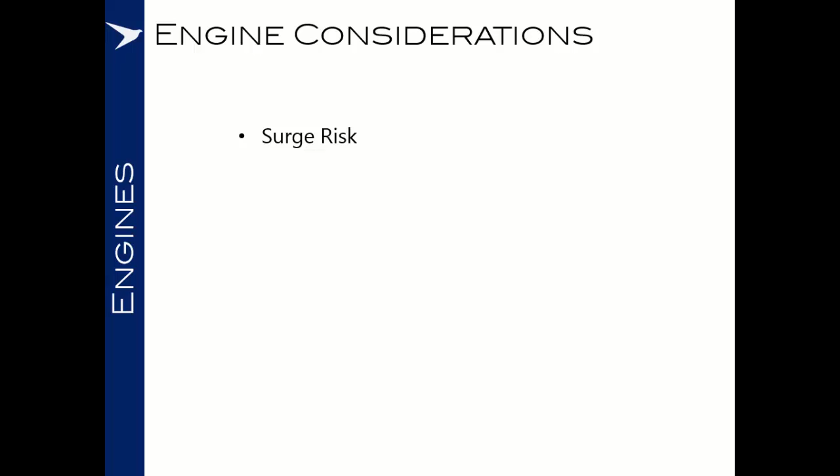So in this brief, we will cover surges, internal engine damage, core lock, rollback, and multi-engine flameout.

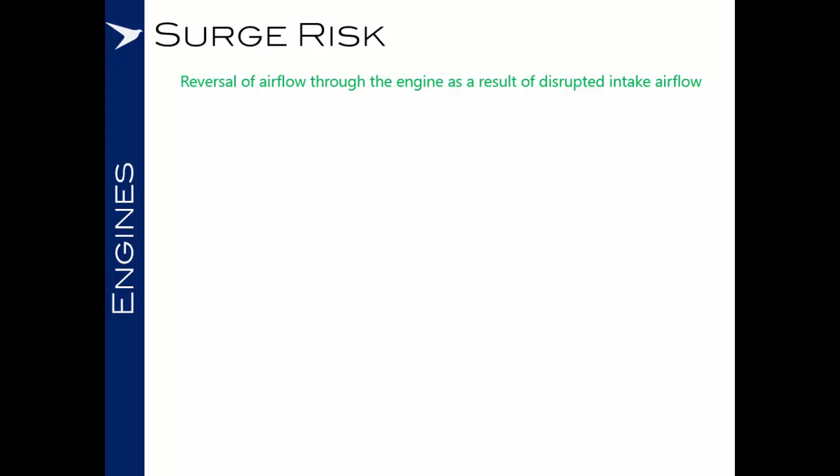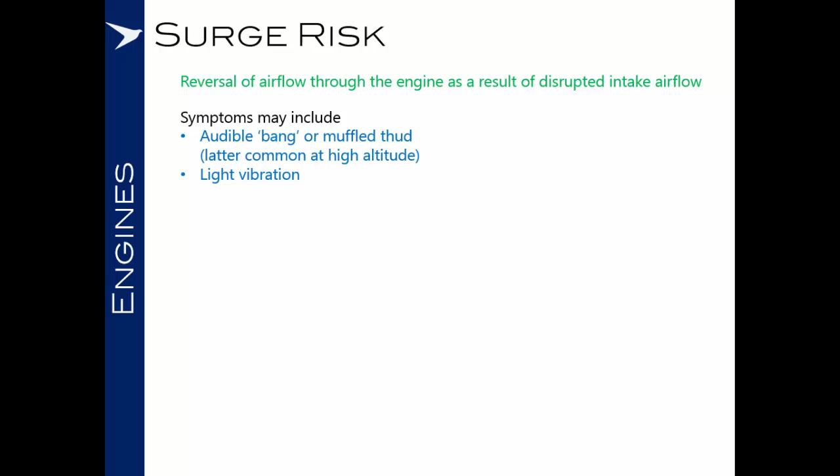Taking surge first then. A surge, or a compressor stall, is a reversal of airflow through the engine as a result of disrupted intake airflow. Symptoms may include an audible bang or a muffled thud, and the latter is more common at high altitude. The bangs are often associated with high power settings or low altitude. You may get light vibration, a rapid rise in EGT.

Surges tend to be in one of three categories. The first of these is a minor surge, where no crew action is required to resolve the surge and the engine will quickly return to normal.

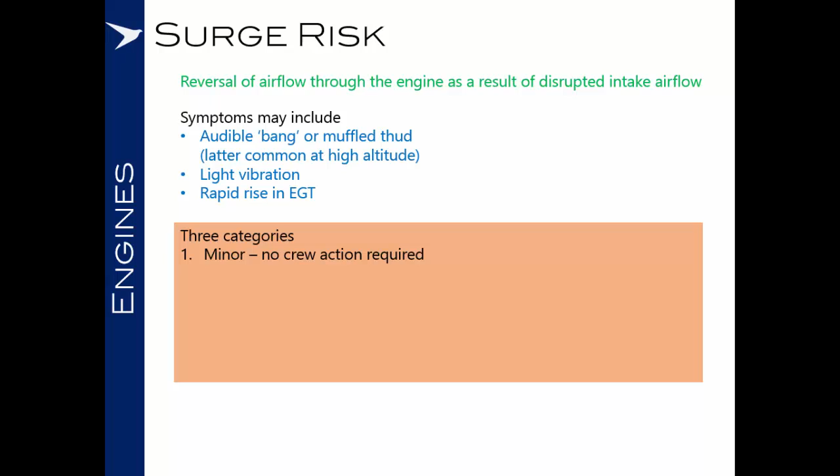The second may see EGT rise to the red sector and remain constant, in which case the crew will be required to reduce thrust to clear the surge and confirm that the EGT reduces. If the surge appears to be resolved, then slowly and cautiously advance the thrust and monitor for signs that the engine may still be surged.

And if the engine surges again, the crew may be required to maintain a low or idle power setting and bring the aircraft back with limited thrust.

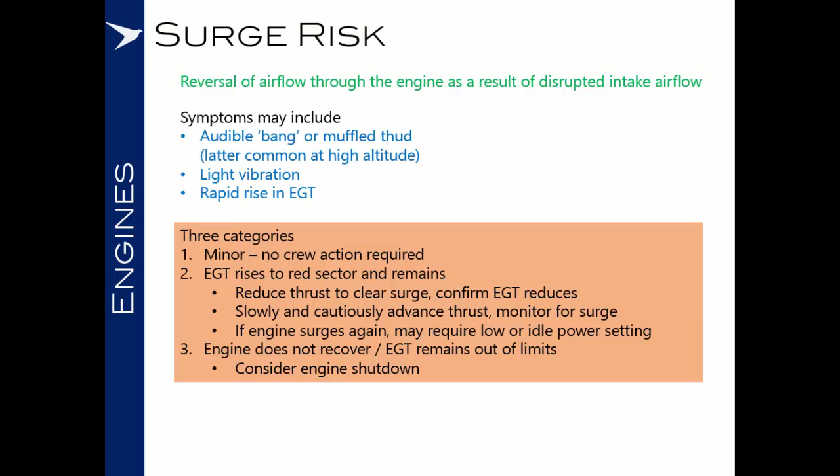The third type of surge is where the engine fails to recover and EGT remains out of limits even with idle thrust, in which case your aircraft may have drills which include an engine shutdown, perhaps an attempted relight. In any case, the guidance has to be to follow your own aircraft checklist and look for your type-specific details.

But as a general note, it's often the case that an engine at idle will still produce less drag and offer some power to aircraft systems, so shutting the engine down is often considered to be a last resort. And even with engines in surge and throttles at idle, an aircraft upset can still be recovered.

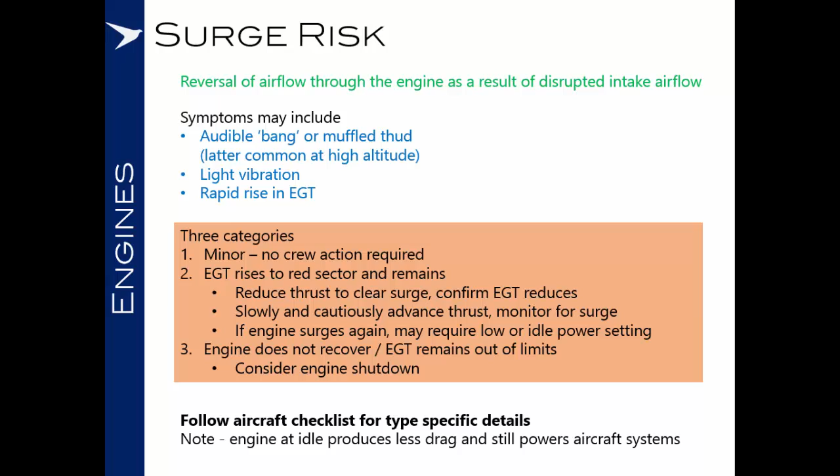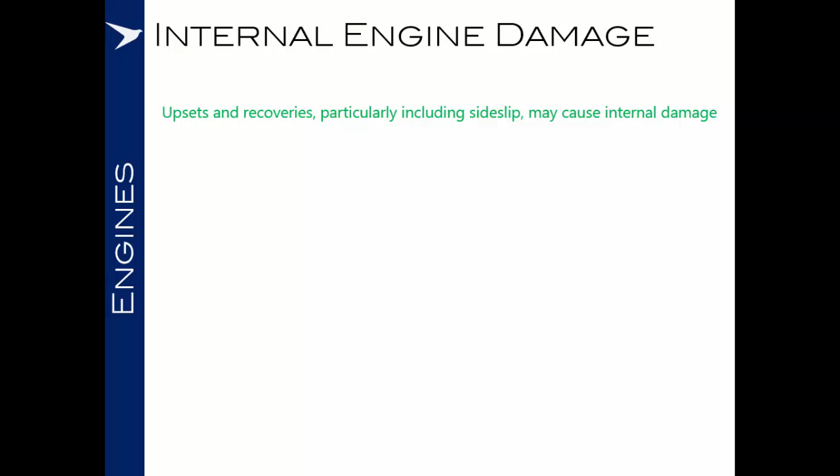Due to the high loads experienced in upset recovery, and particularly where there is any degree of side slip, there's a possibility that internal damage may occur in the engine. Be prepared for the fact that you'll probably get some adverse engine indications during upset recovery, and fly the aeroplane first. You must fly the aeroplane first and recover from the upset, establishing a safe flight path before dealing with any adverse engine indications.

And of course, there will be a startle factor associated, and particularly with surges or compressor stalls, where they may be accompanied by a loud bang and extreme engine indications, it can be very tempting to get your head inside the cockpit and start trying to deal with the engine emergencies.

You must resist and concentrate on flying the aeroplane to safety. Once you're in a safe flight regime, continue to fly the aeroplane first and ensure that there are no secondary upsets and that the cause of the first upset is discussed. Then methodically follow your checklist for adverse engine indications which remain, and be prepared for the fact that even if you don't have any instant adverse engine indications, you may still have some engine damage, so treat the engines with care.

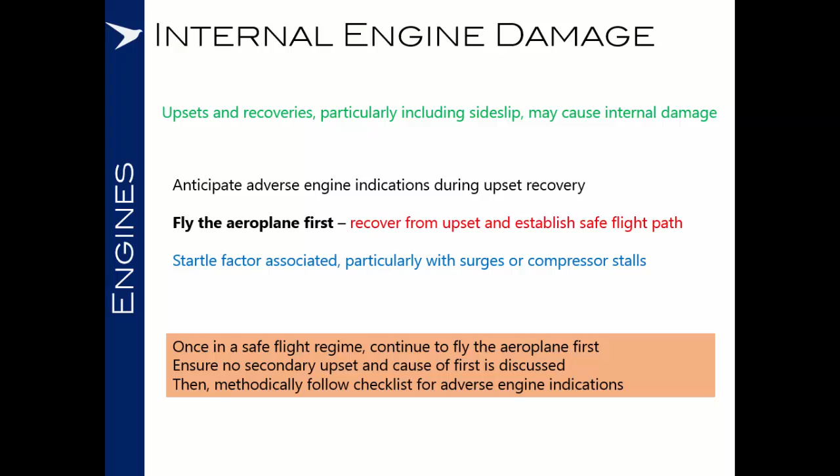Moving on, let's consider core lock. There's potential for this to occur after an abnormal thermal event in the engine. For instance, the engine may have flamed out at a low airspeed following an upset.

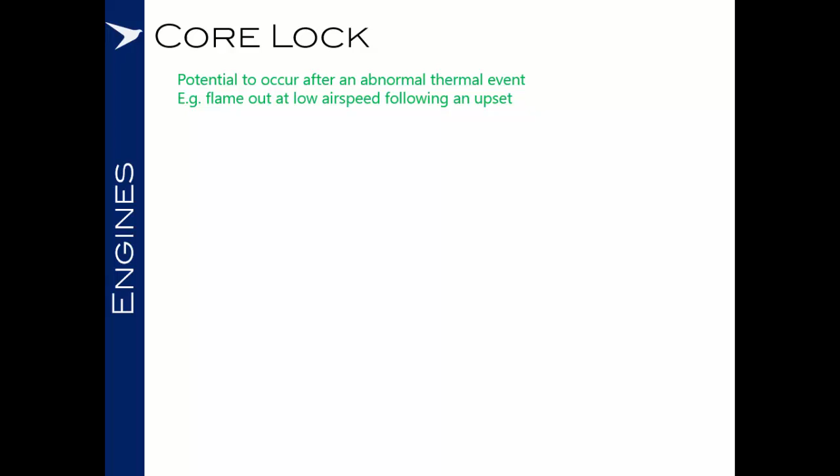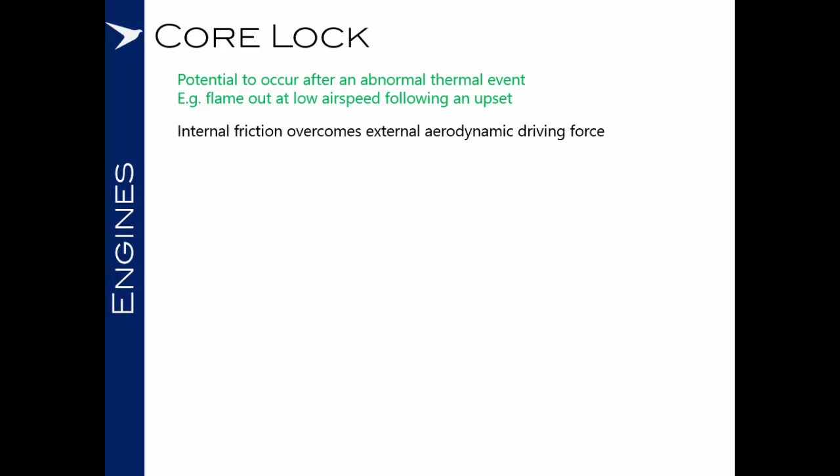A core lock is where the internal friction in the engine overcomes the external aerodynamic driving force which keeps the engine windmilling. This causes the core of the engine to stop rotating, and as the engine is rapidly cooled, the differential cooling of the materials inside causes the outer casing to cool faster than hotter internal components. As the casing cools, it shrinks and clamps down on the core, locking it and preventing rotation.

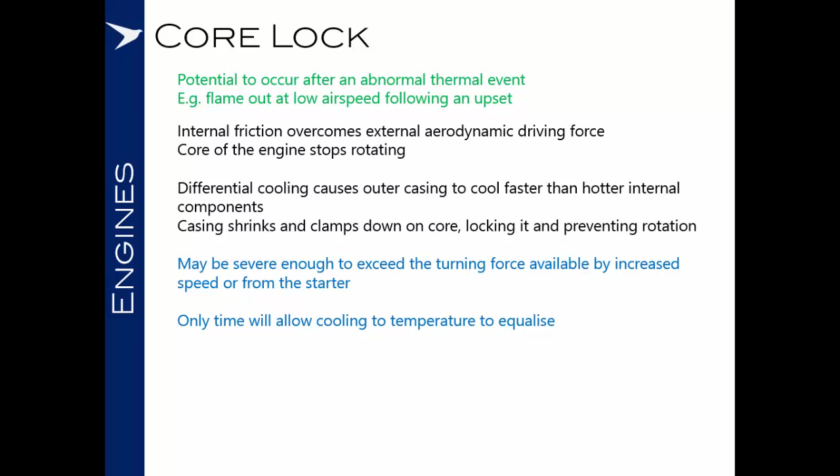There is potential for this to be severe enough to exceed the turning force available by increasing speed or from the engine's own starter. The only way to overcome core lock is to have enough time to allow cooling to occur and for the temperature inside the engine to equalise.

So after an upset, monitor the engine instruments, and if you see that the engine spool speed is zero, there could either be a case of mechanical failure due to damage incurred by the upset, or core lock. In either case, you're looking to achieve your best lift over drag speed.

Don't be tempted to immediately go into trying to achieve your best windmill speed and start to work through your forced landing options. At this point you're trying to maximise your time airborne to allow cooling throughout the engine, and if you see that rotation begins in the engine, then you can contemplate diving for a windmill speed and relight.

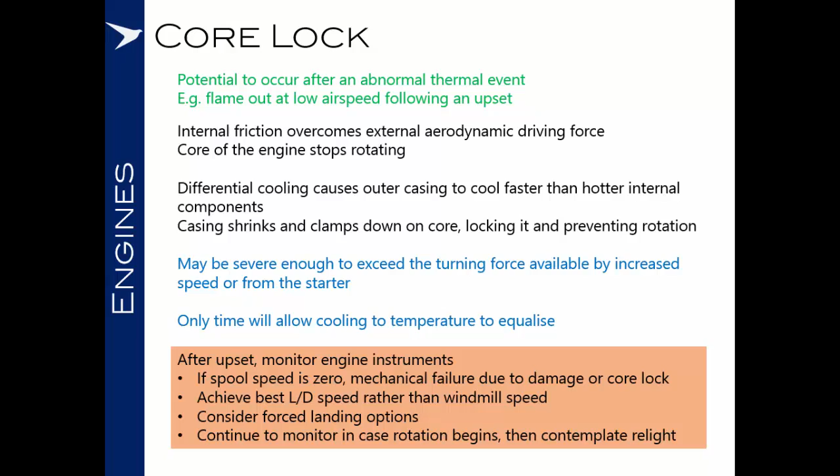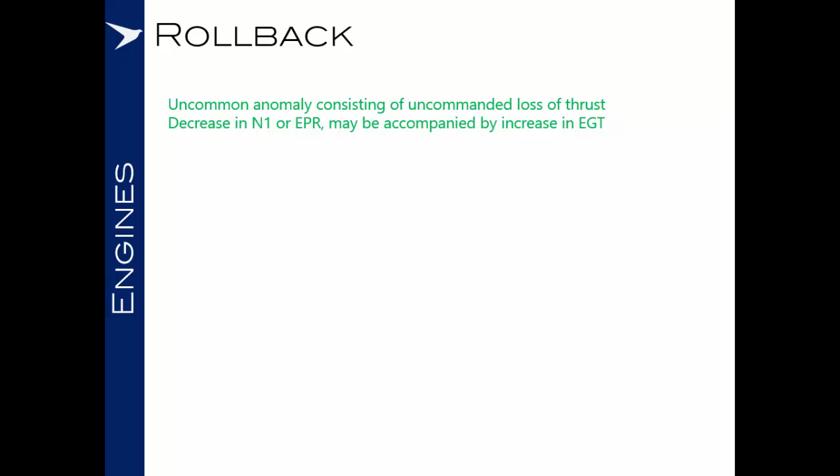Rollback is an uncommon anomaly consisting of an uncommanded loss of thrust with a decrease in N1 or EPR, which may be accompanied by an increase in EGT. It can be caused by a high angle of attack, disrupted airflow, a mechanical failure, fuel control issues, icing, or moisture.

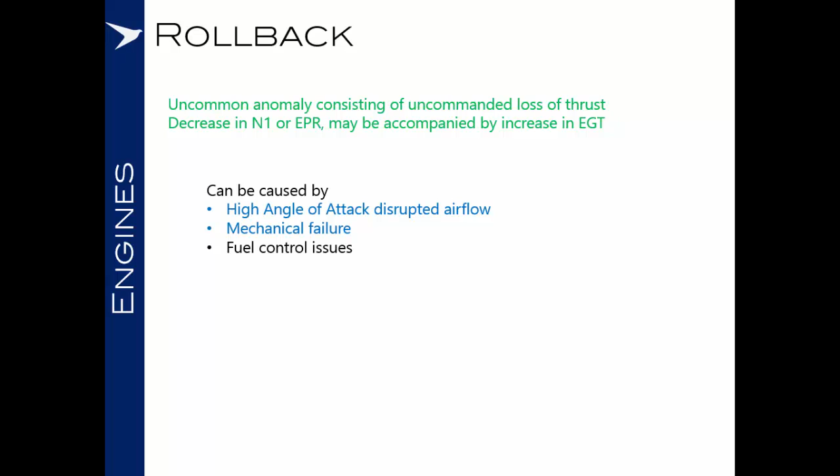The two causes marked in blue here are of particular significance to us in considering upset recovery. Due to the forces involved in an upset recovery, there is an increased chance of mechanical failure, and it may be that we've flown at a high angle of attack and possibly disrupted the engine intake airflow. A rollback will usually result in either a core lock or an engine flameout.

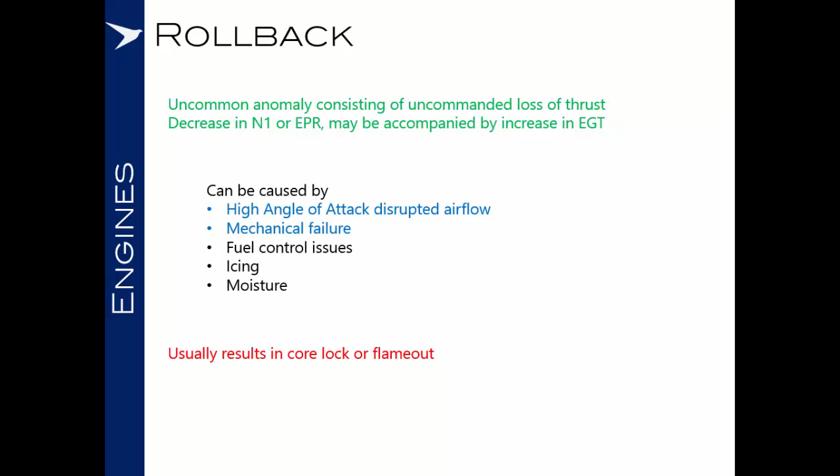Moving on to multi-engine flameouts. These can occur as a result of high altitude, low airspeed events, and potentially also as a result of upset due to surge or engine damage.

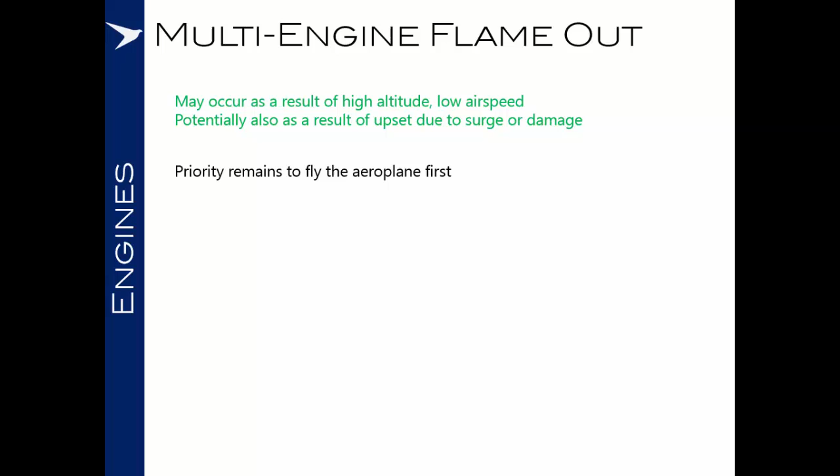Of course, the priority has to remain to fly the aeroplane first. Accomplish the checklist memory items and subsequent actions, and be aware of requirements for your aircraft in a flameout situation, such as areas of the flight envelope where windmill starts are more likely.

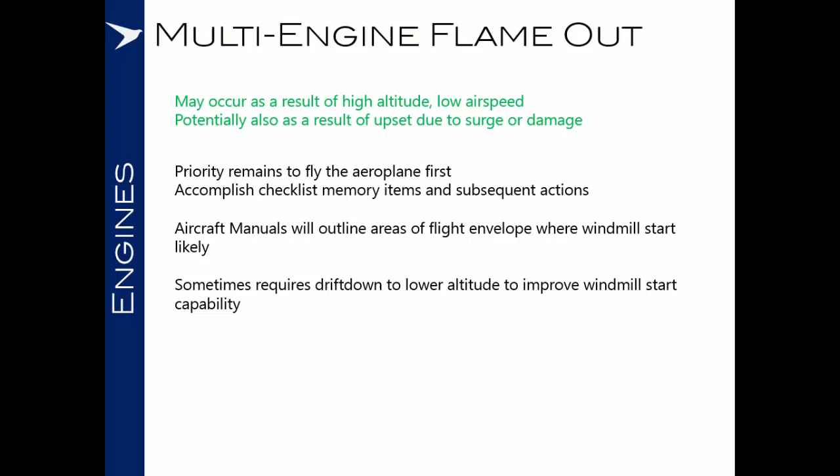If the multi-engine flameout occurred at high altitude, sometimes your aircraft manual may require you to perform a drift down to a lower altitude to improve the windmill start capability. But the key message here has to be that your first priority is to fly the aeroplane safely.

With the aircraft in a safe flight regime, strict adherence to the checklist is essential to maximise your chances of successful relight.

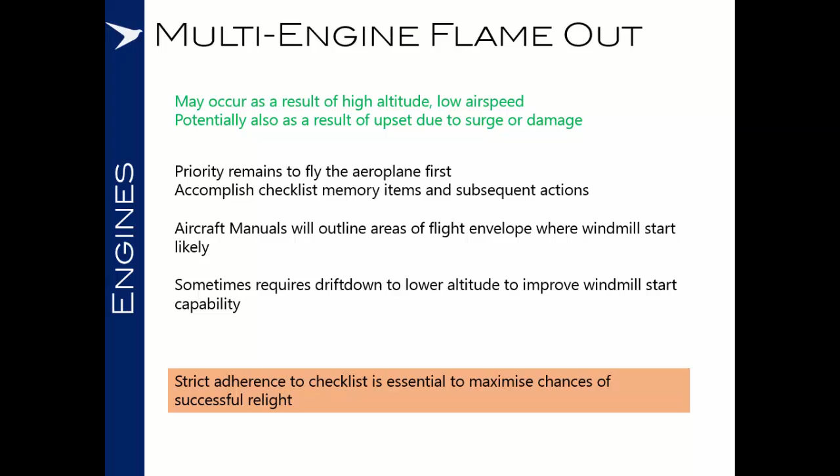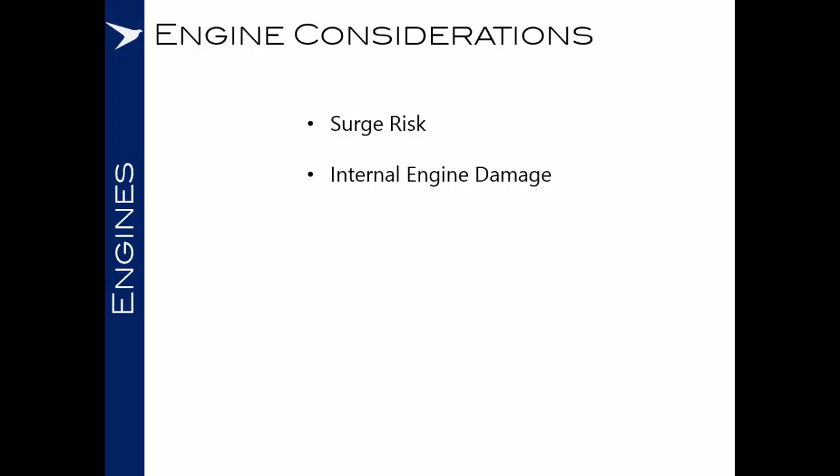So in this section about engine considerations, we've looked at surge risk, internal engine damage, core lock, rollback, and risk of multi-engine flameout. The key message remains that you must fly the aeroplane first, deal with the upset as your top priority. Once you have the aircraft in a safe flight regime with the chances of a secondary upset minimised, then you can start to methodically and thoughtfully work through any adverse engine indications that you have.

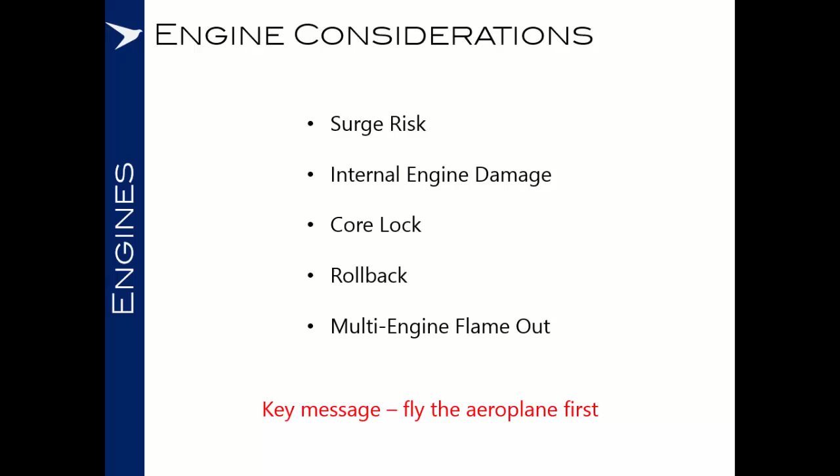It's also important for you to be prepared for the fact that in an aircraft upset situation, you may well start to get distracting warnings which demand you to look at the engine instruments. Think about how you're going to deal with this and make sure that you've coached yourself mentally that in those situations you will deal with the upset first and establish a safe flight regime.